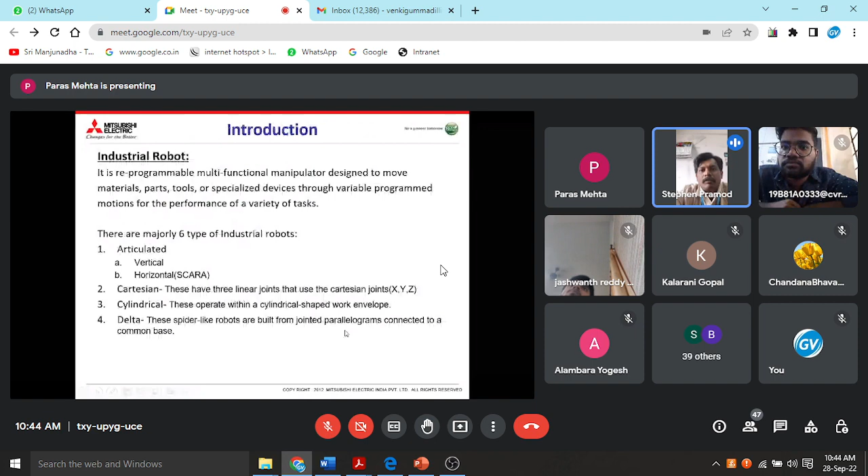Sir, can you put it on the slideshow so that the screen appears bigger? Yeah, good, sir. Thank you, sir. Now it's visible. Yes, sir, it is. Thank you, sir.

Okay, so we will see the control wiring for our emergency inputs and outputs and our booster, and we'll see how our teach box works. Then we'll see what are the types of softwares we have in Mitsubishi Electric.

And then in software we will see how to create a new program, how to create a new project, and what features we can use through our software, how to teach, how to make a new program, and how to set the robot origin and home position settings that we will see in these 2 days.

So today we will be covering most of the part of our software and teach box operation, and tomorrow we will be doing special programs for two programs we will make. One is pick and place, and the second one will be the pallet program, where the robot automatically will pick and place the object and place it in the pallet form.

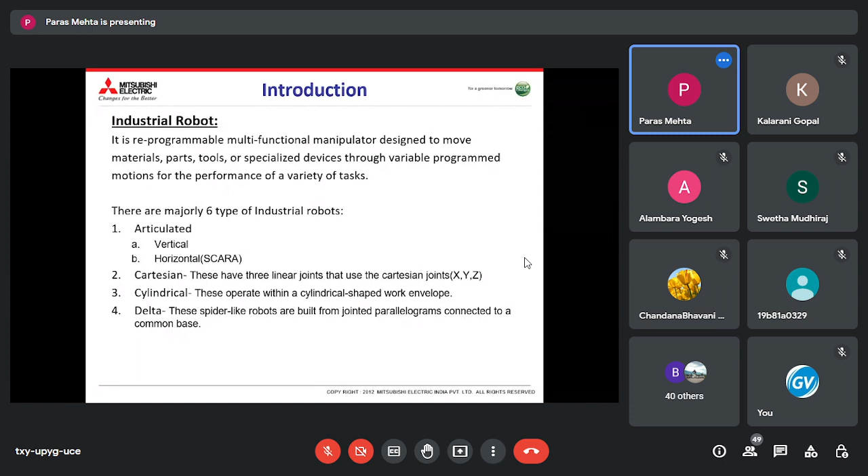So there are six types of industrial robots. First one is articulated - there are two types, vertical and horizontal. Vertical will be having 6 axes and horizontal will be having 4 axes. Second one is Cartesian, which will provide only three linear motions that I'll show. Third one is cylindrical - these operate within a cylindrical shaped work envelope. And fourth one is delta - these spider-like robots are built from jointed parallelograms connected to a common base. So these are the types of robots: vertical articulated, horizontal, Cartesian, cylindrical, and delta.

So what are the advantages of industrial robots? They provide repetitive work cycles, can work easily in hazardous work environments, and consistency and accuracy is very high. Difficult tasks which are very difficult for humans, the robot can perform. Multi-shift operations - it can work for a full day continuously. Programmable and flexible - we can change the program as per our requirement, and we can position the robot as per requirements. And it interfaces with other computer systems - we can connect other modules also with the robot for controlling.

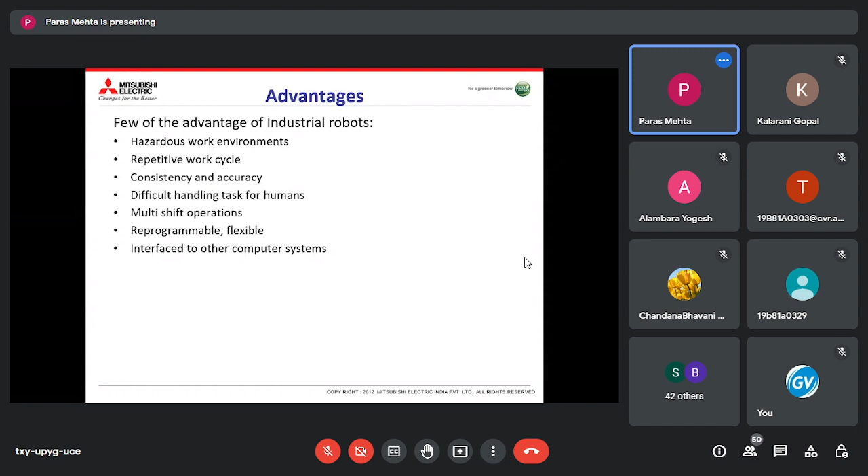So this is a 6-axis vertical articulated robot. It consists of joints and links. Joints provide relative motion and links are rigid members between joints. So we can see this is the base of the robot, and this is the J1 axis, joint 1. This is joint 2, this is joint 3, and this is joint 4. And this is joint 5 and 6. So it is a hand-like structure, and each joint provides a degree of freedom. There are 6 different degrees of freedom in 6 joints.

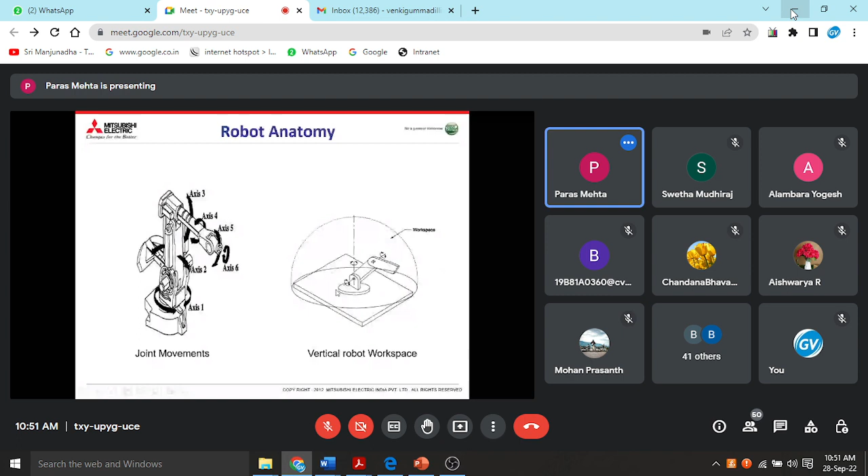Now we'll see description of various envelopes. Envelope means the area where the robot can move its arm maximum from its base. So this is the maximum envelope. We can see the robot can move in this envelope at any position.

This is the restricted envelope. Restricted means the space where we provide restriction like fencing and any other module or motor mounted for safety, and any door mounted. So this is the restricted envelope, and the operating envelope will be the black part, where the robot will perform its operation, or the application we have defined will work in this operating envelope.

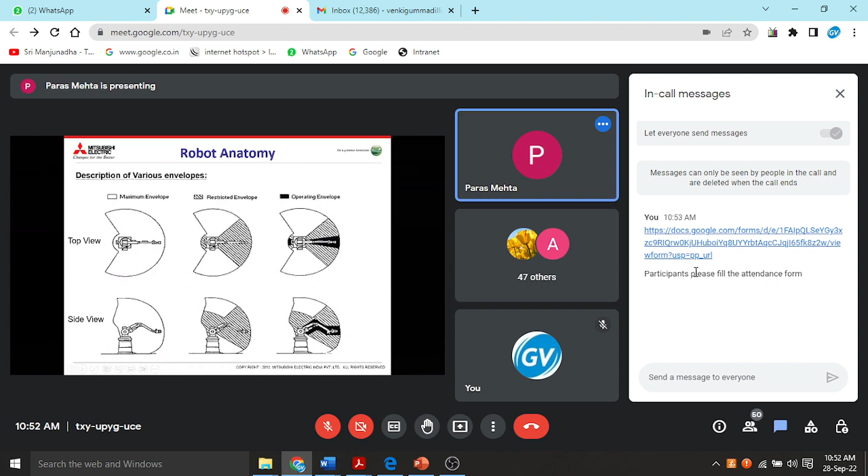Same way, we can see the side view. So again, the maximum envelope encompasses the maximum design movement of all robot parts, including the end effector, workpiece, and attachments. The restricted envelope is that portion of the maximum envelope which a robot is restricted by limiting devices like fencing. And the third one is operating, which is used by the robot while performing its program motions.

So this is our four axis robot. This is called a SCARA robot. SCARA means selective compliant articulated robotic arm. This means that the robot provides substantial rigidity in the vertical direction but compliance in the horizontal plane. This makes it ideal for many assembly tasks.

So this is the special type mostly used for material handling, for picking and placing, assembly, loading and unloading. So again, this is the workspace for a 4-axis or SCARA robot. In this complete workspace, it can move to any point.

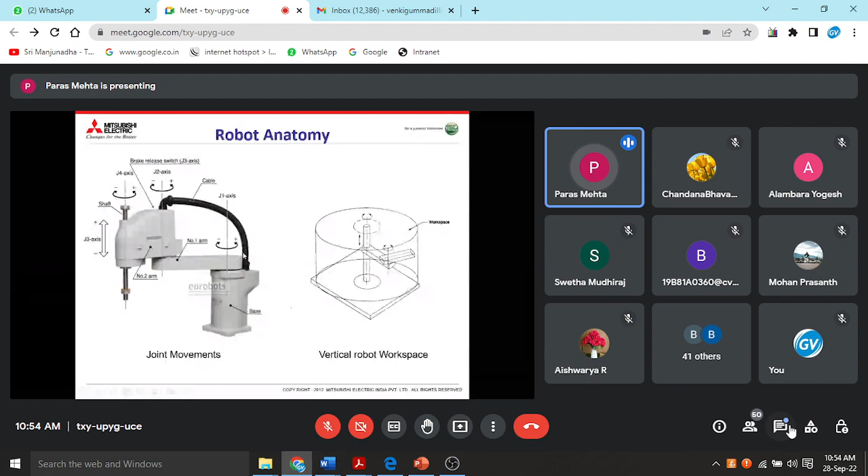So we will see the four joints here. One is the J1 axis that can move in minus and plus direction. This is J2, which can also move in both directions, minus and plus. Actually, each axis has a motion limit defined so that it will not rotate in a complete circle. But as per our requirement, we can edit the motion limit of each axis.

That we will see in our RT Toolbox 3 software. Yes, in the chat box a participant raised a question.

What does the envelope mean? Okay, okay, I'll just check.

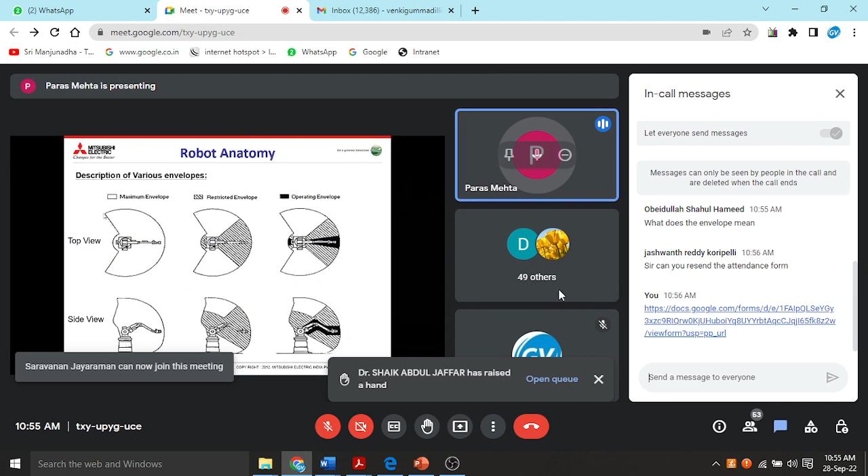Okay, I'll just explain again. So envelope is the maximum design movement. Like in this picture, we can see the actual factory default setting that came with each axis limit. So if I move the J1 axis, it will move from this end to this end. So this is the maximum envelope. It will not go behind this point, so this is the blank area behind. It will not go at this side. So envelope means the area that the robot can move to, its design parts.

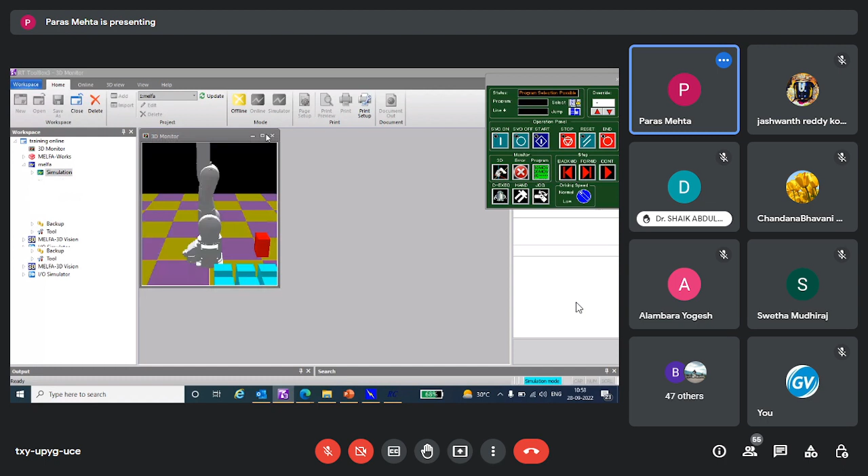Like I can show you right now for better understanding. As an example, I will show this in the software. So this is my FR series 7 kg robot. So for envelope, maximum envelope, we can see it like this.

The J1 axis is moving from minus 240 to plus 240. So this is the limit as a factory default that comes with the robot. So if I move the robot parts completely...

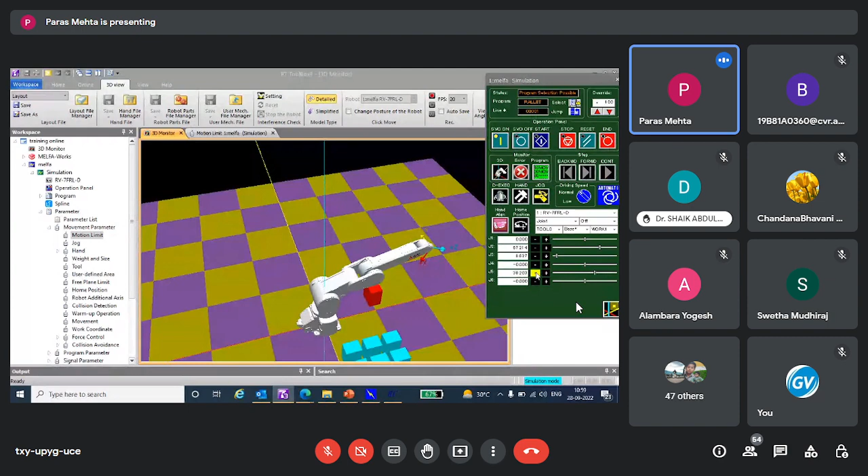So this is the maximum reach of the robot, and I'll make a circle like this. So right now it's 240 in the positive direction, till going to minus 240. So this is the complete workspace. But now what is happening? We need to check the envelope.

So we will set our limit as per our requirement, so that for this we can set this as our limit, and we can set this as our limit. So this is the maximum envelope we are defining for the robot, like we have just moved minus 240 to plus 240. So this is minus 240. Is this clear to all?

And we can also restrict the envelope. I'll also show you that in the software moving further. And we can also define this operating envelope too.

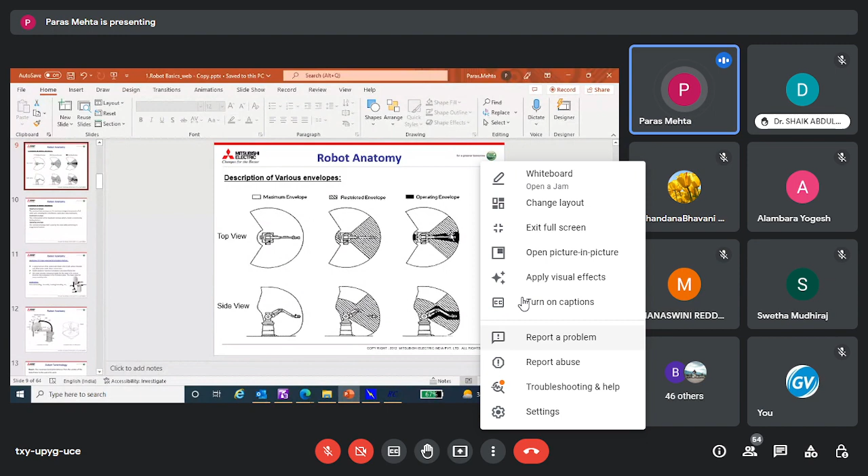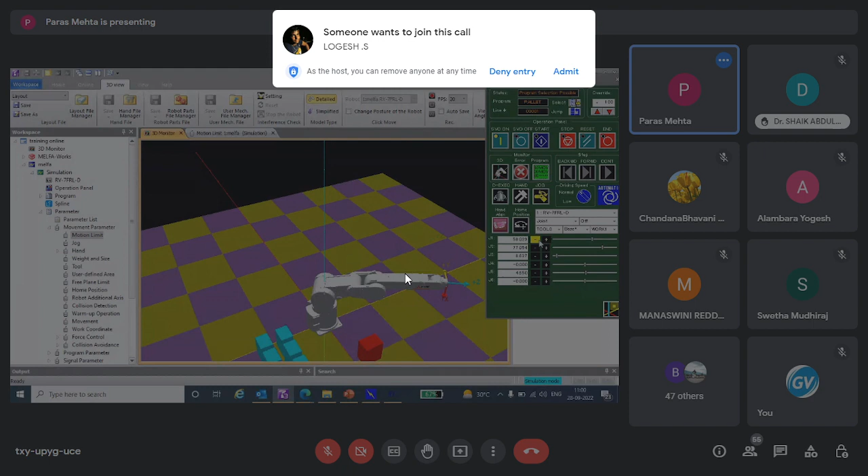So I need this. So this is 70, and this is minus 70. So I need this envelope as a maximum envelope. So what I will do, I'll set the motion limit and write it to the controller.

Now we will see the maximum envelope that we have defined. The robot should not move behind this point and this point. So this is our maximum envelope, it will not move behind this.

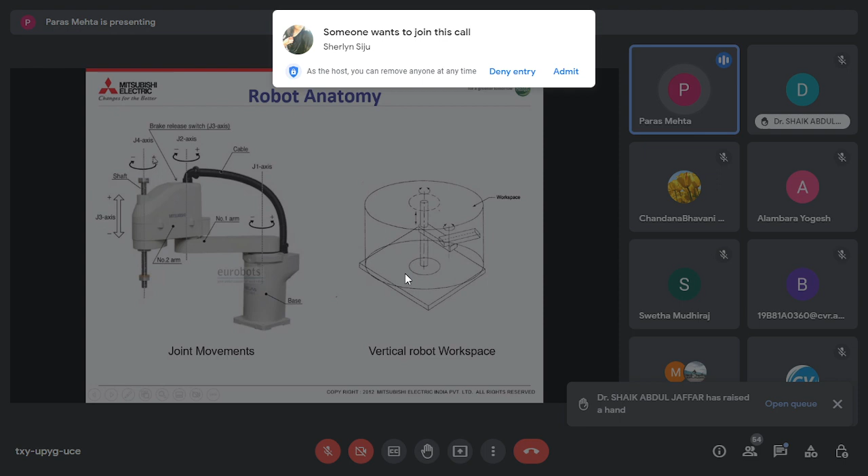For better understanding, I'll just show one video. So this is the SCARA robot. This is moving in J1 direction. This is J2, this is J3 and J4.

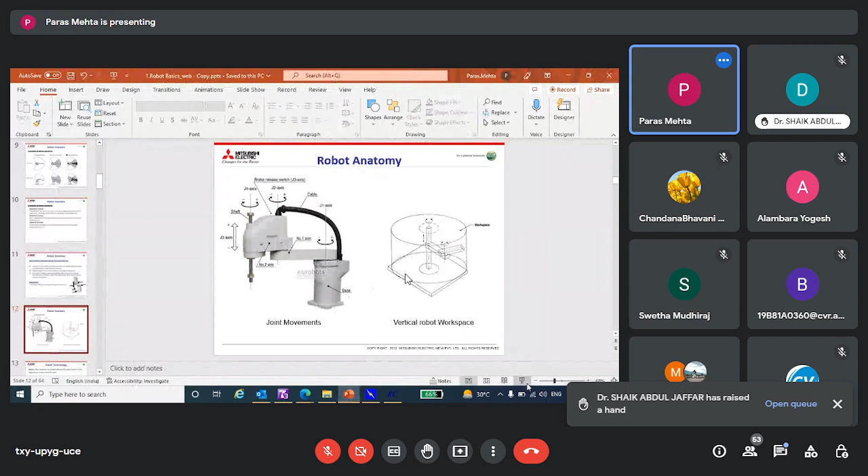Likewise, we can move to its workspace, like it's moving in rotational. So this is the SCARA robot.

So now we will see the robot terminology.

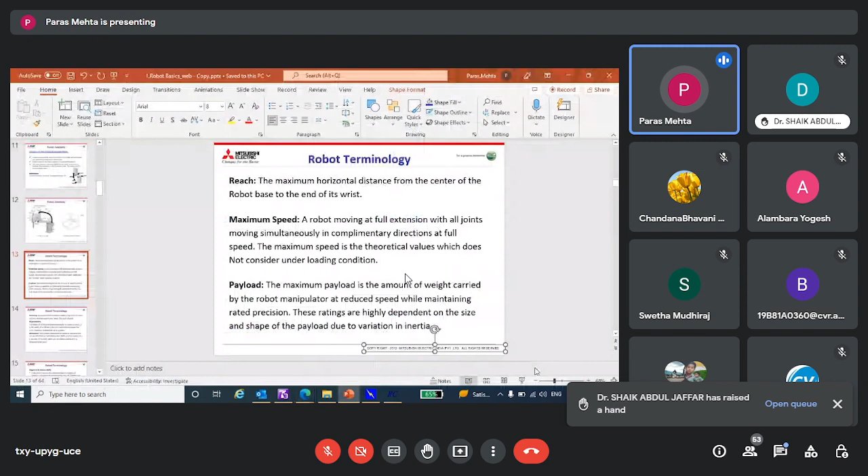Okay, now the robot terminology. There are six types of terminology: what is the reach, what is the maximum speed, what we call payload, and accuracy, repeatability, and resolution.

So we'll first discuss reach. The maximum distance the robot can cover is the maximum reach, horizontal distance from the robot base. This is the base of the robot. From here to the maximum distance it can move is the robot reach.

And maximum speed: the robot moving at full extension with all joints moving simultaneously in complementary directions at full speed. The maximum speed is the theoretical value which doesn't consider the loading condition.

And the third one is payload. It is the maximum load or maximum weight carried by the robot manipulator at reduced speed while maintaining rated precision.

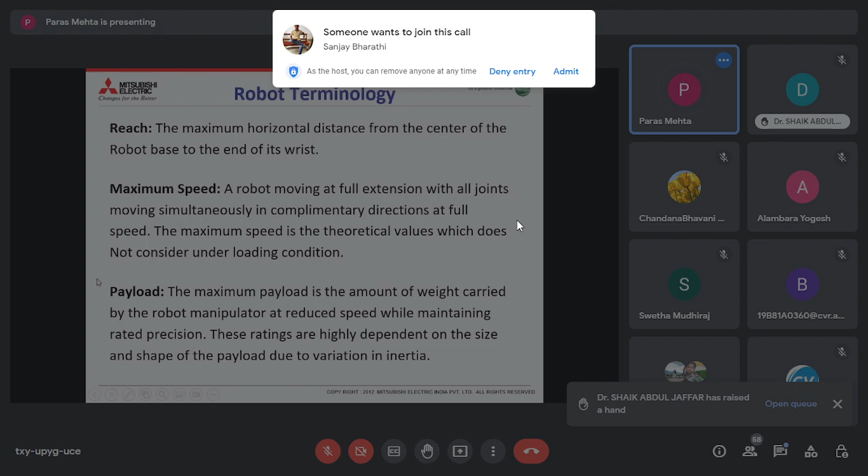So this is like we can mount our tool or hand at this robot arm in SCARA, and here at joint 6 we can mount our tool, like I have shown in a video, that is used for picking or placing. That is the weight of the tool that we are mounting on the J6 axis of vertical and J4 axis of SCARA robot.

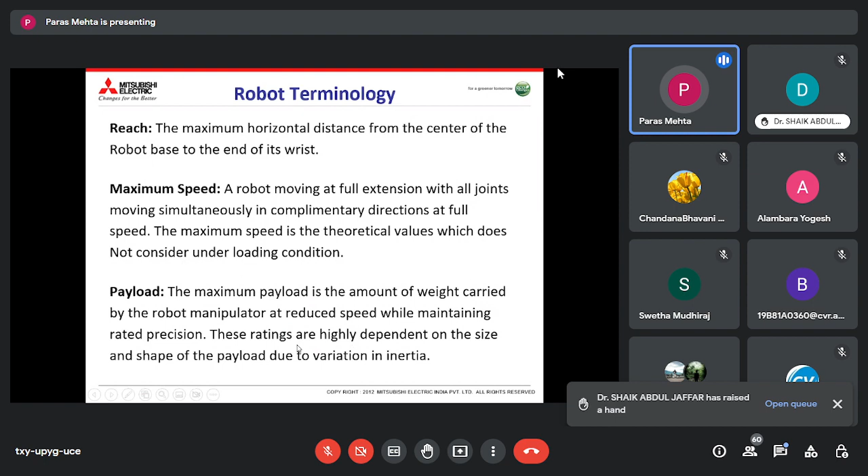Once you fill the measurement, these ratings are highly dependent on the size and shape of the payload due to variation in inertia. So we need to select the size and shape accordingly, so that the robot takes proper load as per the designated model.

So this is accuracy. Accuracy refers to a robot's ability to position its wrist end at a desired target point within the work volume. So this is the accuracy.

I'll share you the link. And repeatability is the ability of a robot to return repeatedly to a given position.

Like we can see the robot is performing the same cycle, so this ability of the robotic system and mechanism to repeat the same motion or achieve the same position and motion. So it will move through a cycle and it will end at its home position.

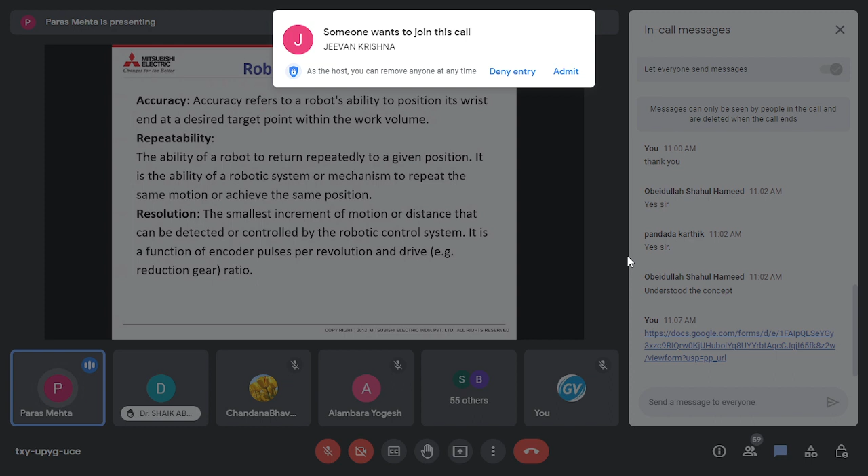So resolution is the smallest increment of motion or distance that can be detected or controlled by the robotic control system. It is a function of encoder pulse per revolution and drive, for example reduction gears ratio.

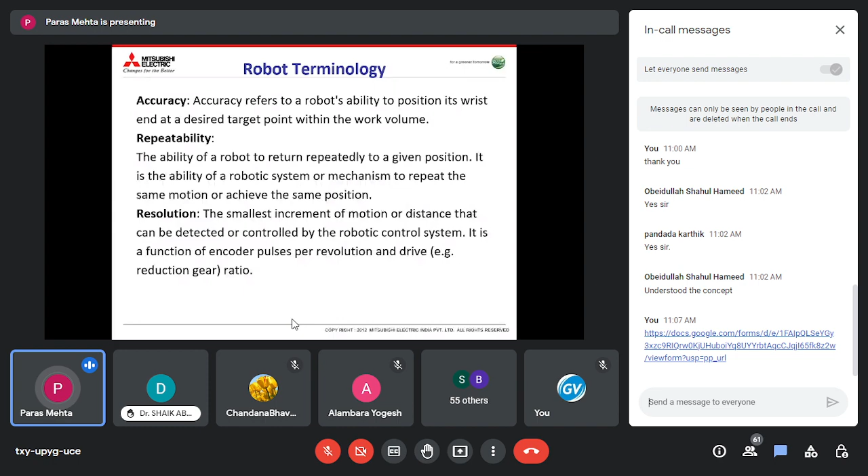So resolution is we can move to 0.01 degree. So this is the least count we can say.

And at high inching speed, there are two options in our teach box that we can select with our speed up and down. So this is the low inching, 2 is high inching, and this is the speed we can select from 5 to 100.

So resolution means the smallest increment of motion distance that can be detected. We can also change the inching degrees after pressing, like I can change it to 0.1, so it will move 0.1.

As per our programming specification, we can also change the speed. In jogging speed, we can change the speed, this is the least count, moving resolution.

Now, degree of freedom. Each joint axis on the robot introduces a degree of freedom. An industrial robot typically has 4 in SCARA, for example, and 6 in articulated systems.

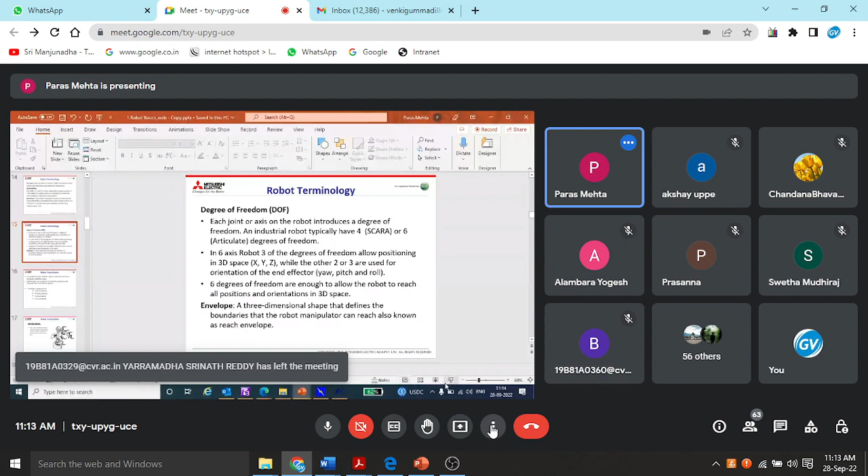So, have you seen this PPT? Yes sir, yes. So we are discussing about the degree of freedom. Three for six axis: three will be XYZ, and three will be yaw, pitch and roll.

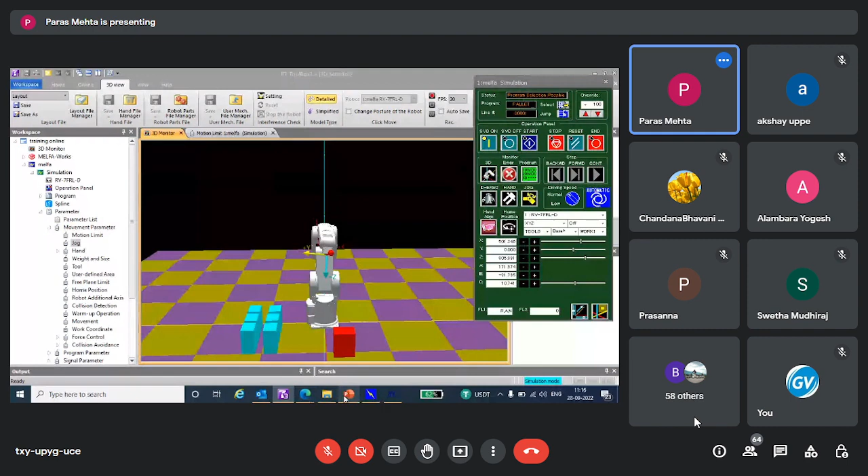So this is clear. With 6 degrees of freedom we can reach at any point.

So, robot coordinates. There are four types of coordinates, like joint coordinates, world, tool, and user.

So what is the coordinate system? Coordinate system defines a plane or space by axis from a fixed point called the origin.

So where is the origin, that we will see in each coordinate. Basically, for world coordinate, the origin is at the base of the robot.

Robot targets and positions are located by measurements along the axis of the coordinate system. So what this means is that in joint coordinate, first we will see the joint, then we will see the world.

So in joint coordinate, each axis we can move: J1, J2, J3, J4, J5, J6. So there are no Cartesian coordinates like X, Y, Z, ABC that we will use in world. So in joint coordinate, we can move the robot each axis.

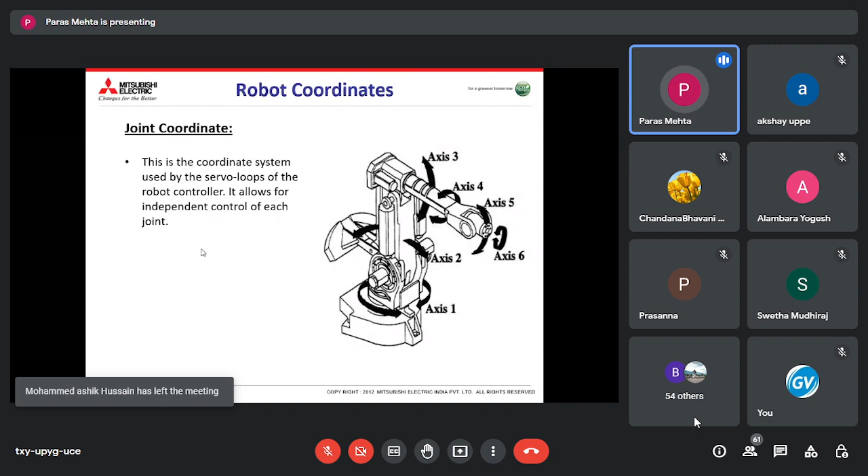I'll select the joint. So this is plus minus J1, this is J2, this is J3, this is J4, this is J5, this is J6, the last wrist rotation. This is J6, only the wrist part is rotating.

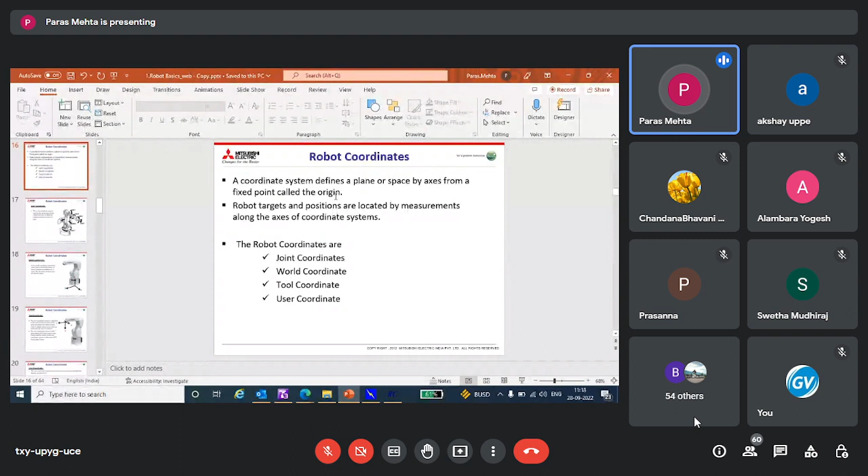So next is world coordinate. This is saying that the space by axis from a fixed point called the origin. So for world coordinate, the origin is at the base of the robot. So we can say the XYZ value will be 0,0,0 here at the base, and wherever the robot point will take, for even picking or placing the parts or the workpiece, it will take all the values with respect to this origin point of 0.

We can see so it is now base with respect to this.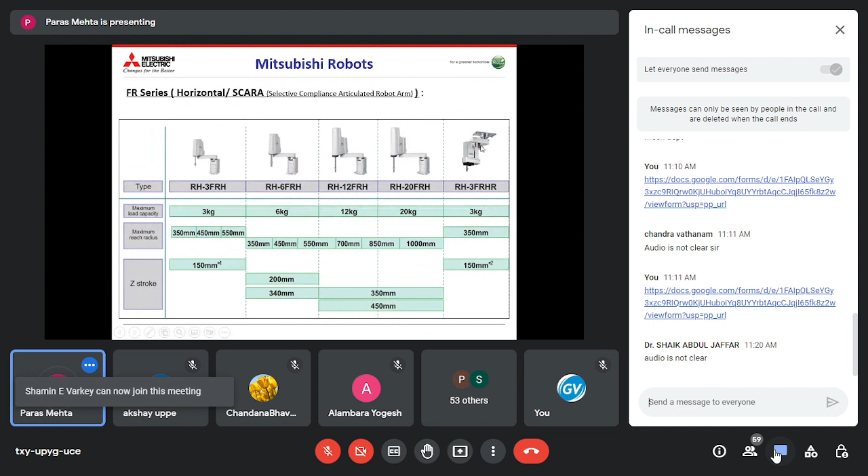So what is the nomenclature that we use for defining a robot model?

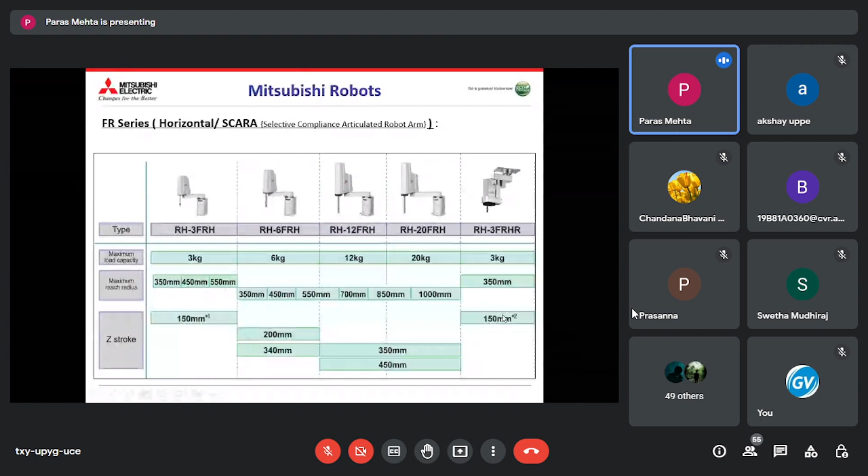So this is the same nomenclature for the horizontal type. The difference is the series.

Sir, your voice is breaking. I think there is some network issue on your side. Your voice is not audible, not clear. Now it's clear, sir. Yes, it's clear. Okay, thank you.

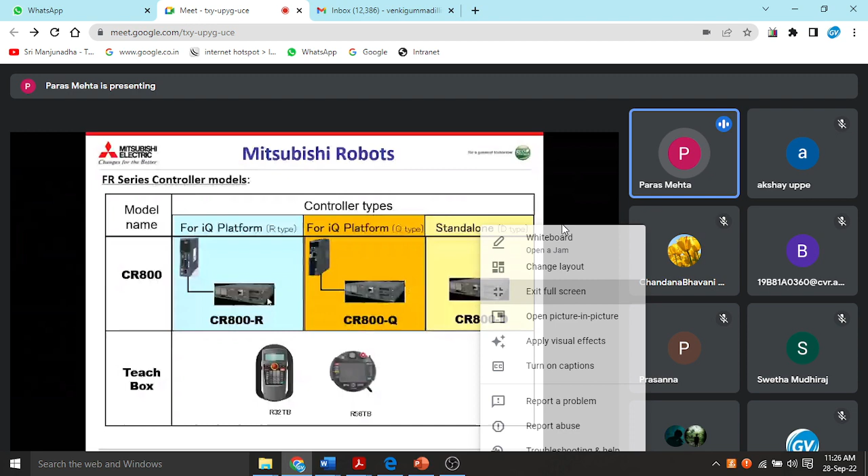So there are three types of controller: D type, Q type, and R type. D type is the standalone type. We can use it for hard wiring, or with the help of CC-Link, we can perform our operations or applications. This is the Q type and R type.

This is used for long lines for some applications, where we can connect one CPU with multiple controllers. This is used for controlling 4 or 5 robots working in the same line with the help of one Q type CPU, which is an add-on CPU connected with the controller.

Same way, this is the R type connected with the controller. This is specially used for a line having 7 or 8 robots working in rhythm, while D type is the standalone type, used when we are having just one cell and one robot.

So there are two types of TB: this is the advanced level R56 TB, and this is the basic level R32 TB. We will see what both TBs can do in the future.

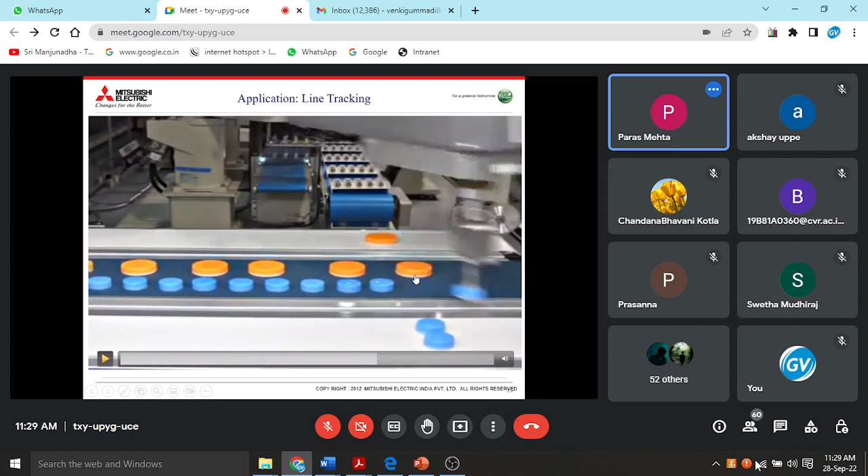In this video, the robot is self-tracking all the parts coming on the conveyor, segregating both parts with the help of a vision camera.

So in this, the camera is integrated with the robot. When the camera sees any device, there are two colors, so it will automatically pick that part. This is the application called line tracking.

Another one is machine tending. The robot performs an operation of picking the workpiece from the conveyor and putting it into the machine, then picking up the finished good and placing it at the final position.

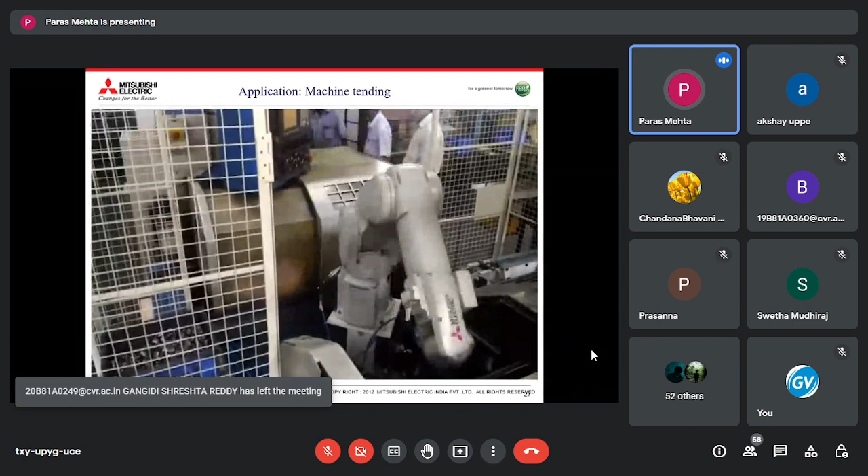Here we can see the synchronization of the robot with these two machines. One machine is finishing the job and the second one is doing the job, so this utilizes the whole time for making the part, working on both sides with this synchronization.

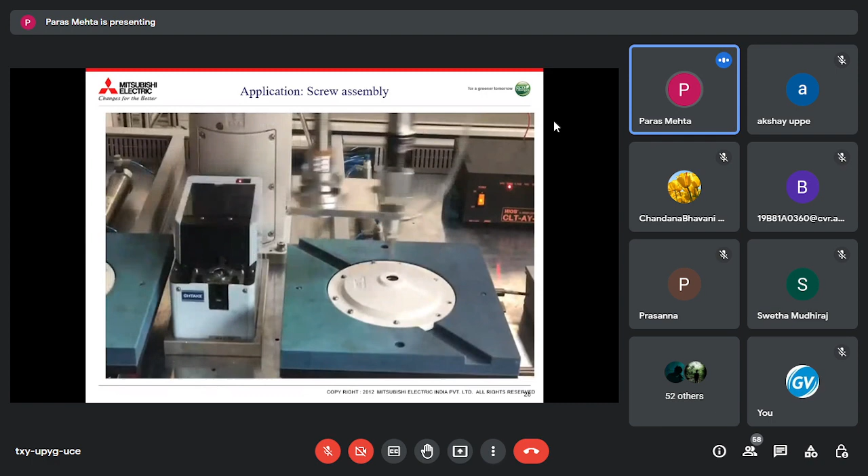Now the third one is screw tightening. This is our Scara F series robot. At the center there is a screw feeder, and the robot is picking and screwing the workpiece. This is the screw assembly application.

Now we will see the power and control wiring for our latest robot, the FR series CR800D controller.

Here we will see the connectors and options available for wiring, and what these two slots are used for. So this is the front view and this is the rear view.

We'll start with the rear point. So this is the AC power supply. There are two types of power supply we can provide to the controller: single phase or three phase, which will be written on the sticker. We can see this is 200 voltage class. So this is a single phase AC in, and the second point is used for earthing, and at the back side there is one air exhaust.

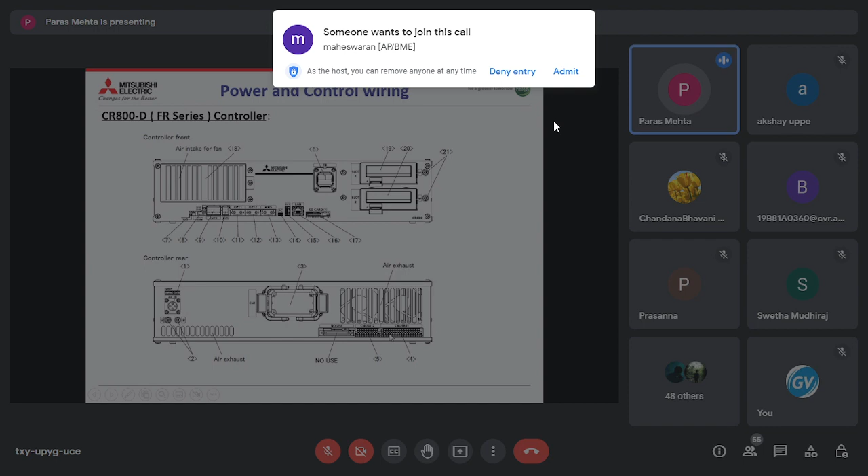On CN1, this is the connector for connecting the robotic arm with the controller. For now this is for no use, it's just a connector. And this is CNUSR 11 and 12. These two connectors are used for our switch selection, so we need to do wiring on these two connectors. Mostly the CNUSR11 connector is used, that we'll see in the wiring diagram. On the front side, there is an air intake fan. Two fans are mounted inside this cover, which are taking the air inside, and one filter is also there for cooling down the PCBs.

Sixth one is the teach box connector, for hard wiring purpose, IO optional card like this, we can see here. This is slot 1 and slot 2.

And 17th is the SD card. And this is the USB and PC, these we use like if we want to perform any program, mini USB, LAN for additional access with the software.

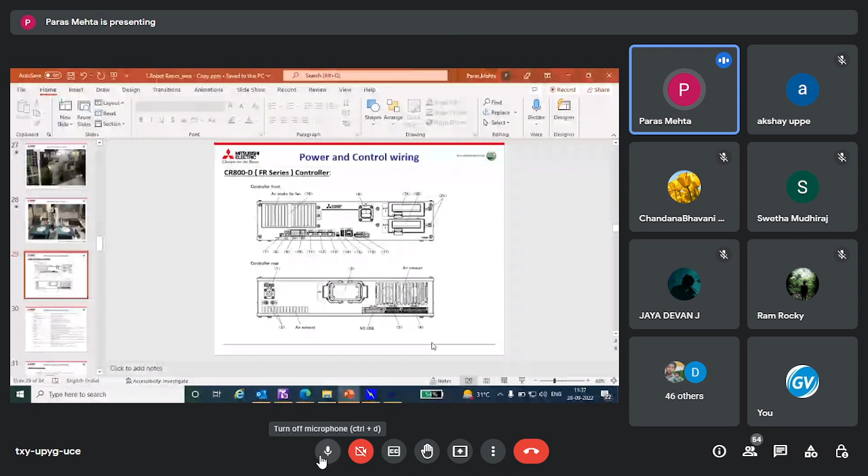you Sir, again, network issue, sir, I think from your side. can connect this option. Sir, audio is not clear, sir. I think network issue again. Now it's clear, sir. Hello. Ah, sir. Yes, sir. Now it's clear. Now it is clear, sir. Earlier, it has problem. Okay, thank you. Screen is visible to all. Yes, sir. It is visible.

So option one and option, this is the configuration.

Hello, sir. Again, network issue, sir. Your voice is not clear. Dear participants, please be online with sir rejoining. Please regret for inconvenience caused. Regret for inconvenience cost. Sir, disconnected, sir, yours. Okay, okay, sir. Fine, fine, sir. Okay. My voice is clear now, sir. Yes, sir. Yes, yes, yes. Sorry for the inconvenience. Actually, the network, I think, some issue.

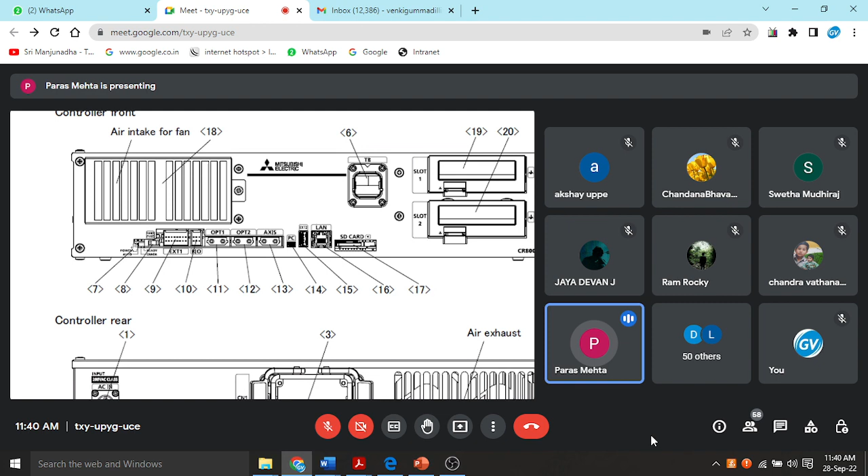And seventh one is the LED panel. It will show four LEDs: power, auto, error, and ready. We can see at this point these four LEDs: power, auto, ready, and error. If there will be any error, it will show the red light, and for power, it will show.

Yes, sir. Yes, sir. Sir,

So this is the connection between our controller and robotic arm. This is the cable, we call it the machine cable, for connecting the robot and controller. And this is the AC power supply we are providing to this connector.

So this is CNUSR11 connector. The numbering is provided like 1 to 16 on the upper lane and 17 to 32 on the bottom lane. Now we will see these points 1, 2, 3, 4, 5: what is the need of these points and where we need to do the wiring for providing any input to the controller and taking out any output from the controller.

So here we can see the 14th and 30 number point in that connector, we can give the input for emergency stop, external emergency stop. Actually, there are two points for each input. If it's not working, we can also connect on 7 and 23, that is 7 number pin and 23 number pin of CNUSR11 connector. Same way, we can connect the door switch input on 13 and 29, or 6 and 22. So there are options for these two: either we need to connect on this or on this.

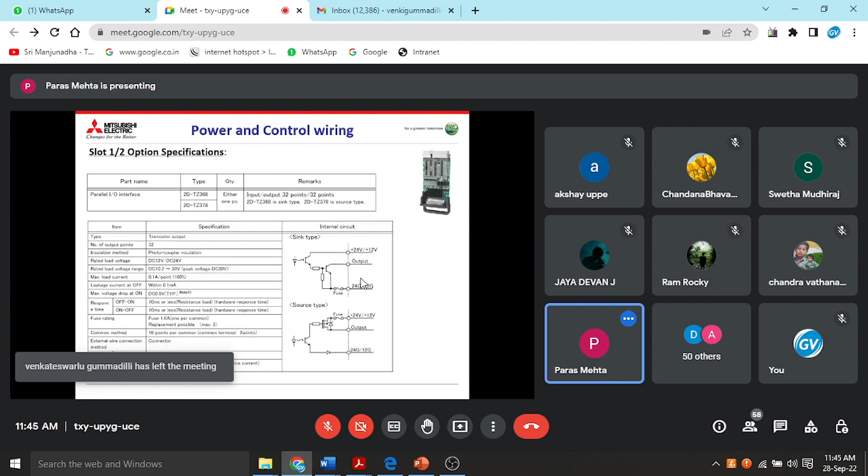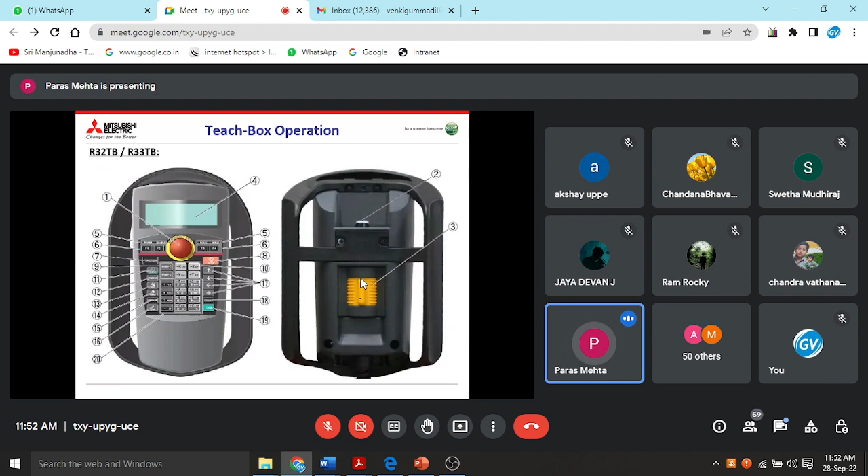This is the back button, and this is the menu button, and this is the complete up and down button for speed up and down, and this is the home position button.

The 9th one is the servo key that we need to press while servo on, and the 10th one is the reset key.

And this is the error we are getting, so this is for getting the error message, and this is the stop button. So these are all the buttons. We can perform any operation with the help of all these buttons.

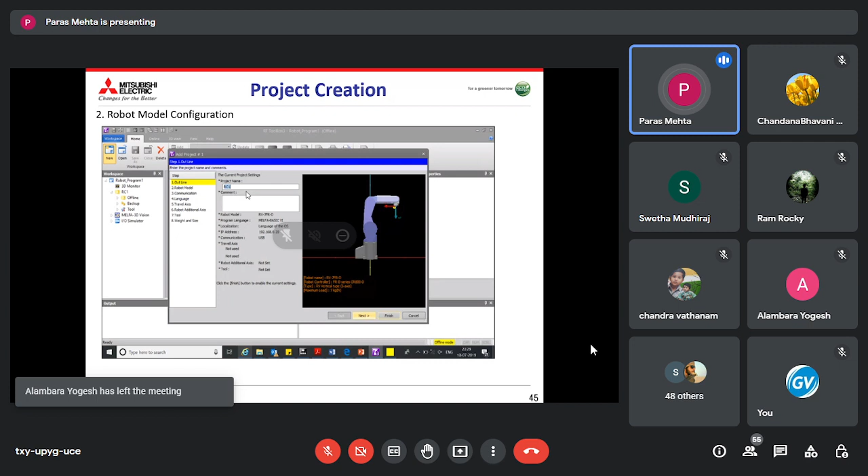So we will enter the details, project name - it's taking RC1 by default, but we can change the name. The second one is the series type, maximum load, and what is the model of the robot we can select in this tab. After this we need to do the settings for communication with the controller.

We need to connect with the USB or Ethernet cable, which we will select in this method. If we are using an IP address Ethernet cable, then we need to check the IP address in the robot and set the same settings on our laptop.

So this is the program language. Melfa Basic 6 is the latest language. By default we will use this.

So this is the travel axis. If we are using any additional axis, then we will select this, otherwise we will not use it. So these four are mandatory - this is 1, 2, 3 and 4. These four are mandatory.

We can just finish it up here also, because if we are not using any tool or any robot additional axis, we don't need to go past this window. So this is the same additional axis - if we are selecting any tool, we need to define the dimensions, and we need to define the size and weight.

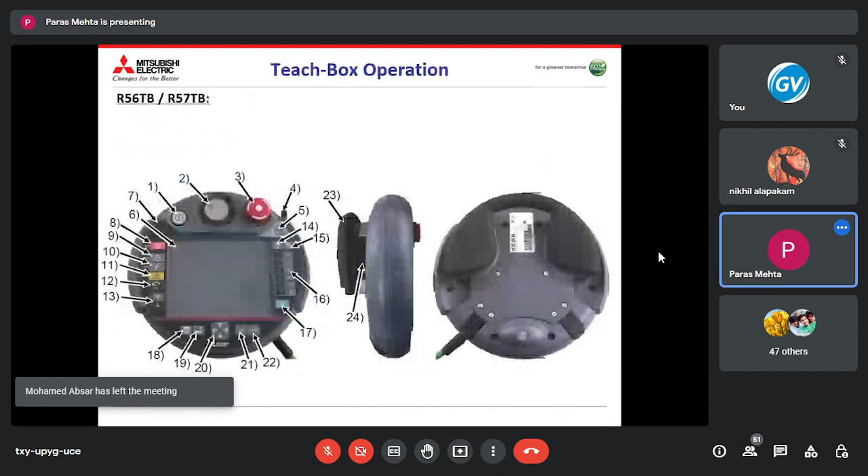If the robot is in auto mode, this switch should be in off condition. If it's on, you will see the light appearing. But this must be in off position, and our mode will be in auto mode, then we will go online if we are connected with the controller. And if we are just simulating, then we can select the simulation.

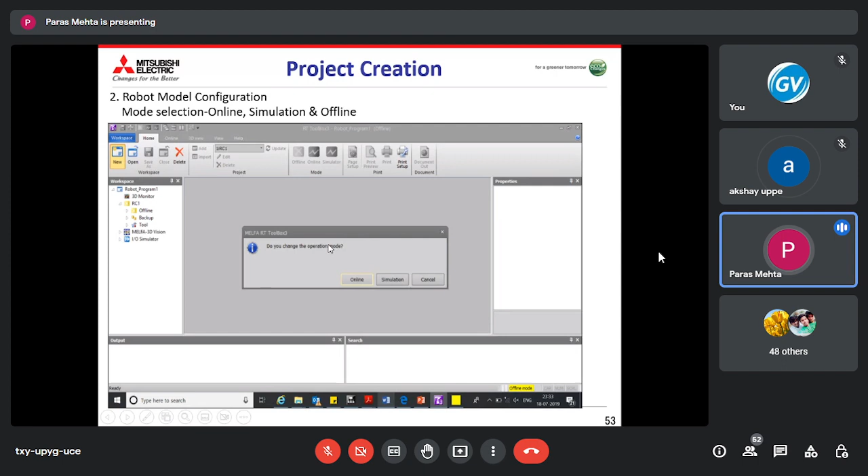So after simulation, we will see this window - this is the 3D monitor of our robot that we have selected here. We have selected the robot model number here, so we will see that same model in the 3D monitor.

And this is the teach box inside RT Toolbox 3. So for a new program, what we will do is just press on this simulation.

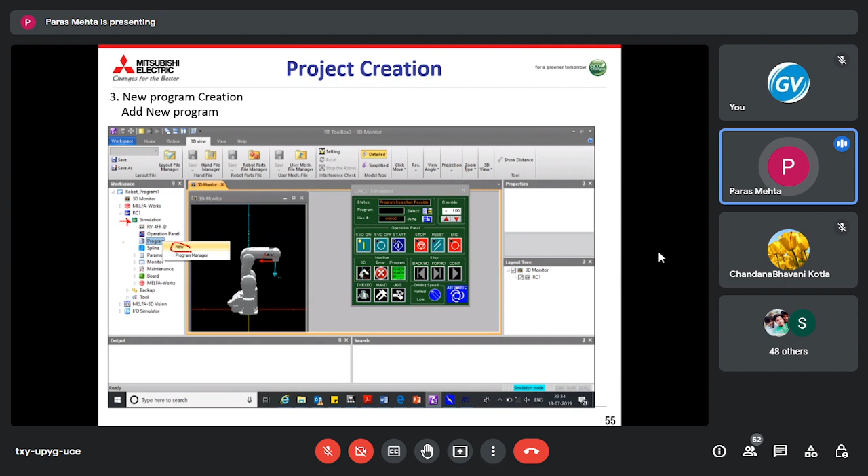So we press the simulation. In this, we check these options are available. Then we right click on program and select new. After selecting new, a new window will appear like this.

Then we will enter the robot program name, whatever we need to define. Like it's taking new one, we can take any name, test, online training, something like that, as we will see.

Now how we will take the backup and restore the backup in the controller, that we can see in this backup line here. Backup.

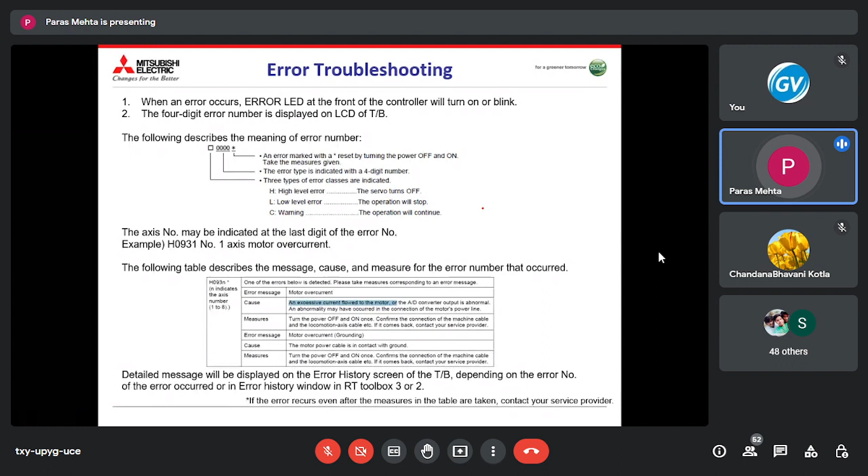So lastly, this is the error troubleshooting. Whenever an error occurs, the error LED will blink or turn on. This is the table that describes completely what is happening, what is the cause, what is the error message, and what measures we can take to eliminate this error.

We can also take the error history, which I will show you in RT Toolbox 3 software. So this is the complete robot basics that we are going to learn in our software.

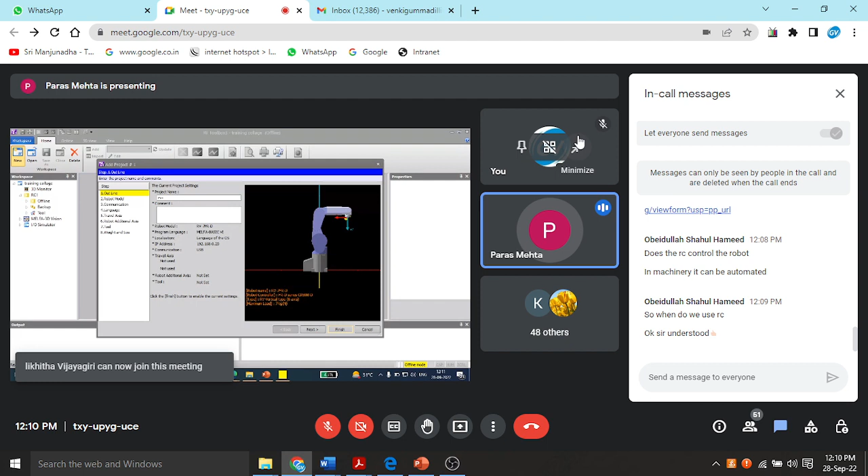RV4FRL, my robot model number 4FRL, and next.

Here we will select the robot arm, so I will be selecting 4FRL. I need to find the options for getting that model. This is the CR800 FR series, the latest series. There are three types, I have already told you the DRQ. I am using the D type for 4FRL, and I'll be taking the vertical robot because it's RV-4FRL, so I will take RV. If it's RH series horizontal type, I can also select the horizontal.

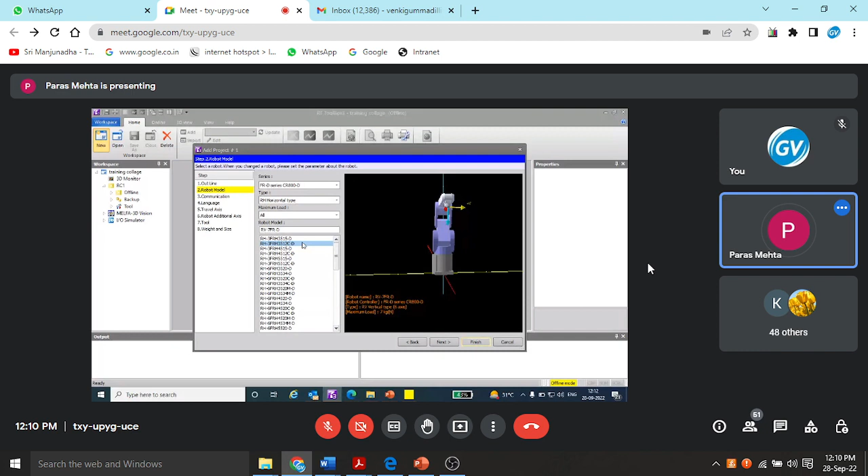This is like we can see the horizontal type. We can also select anything. I have selected the vertical type, 6 axis, and my load is 4 kg, so I'll select the 4 kg here. So the options available for 4 kg are visible here. My robot is 4FRLD, so I will be selecting this.

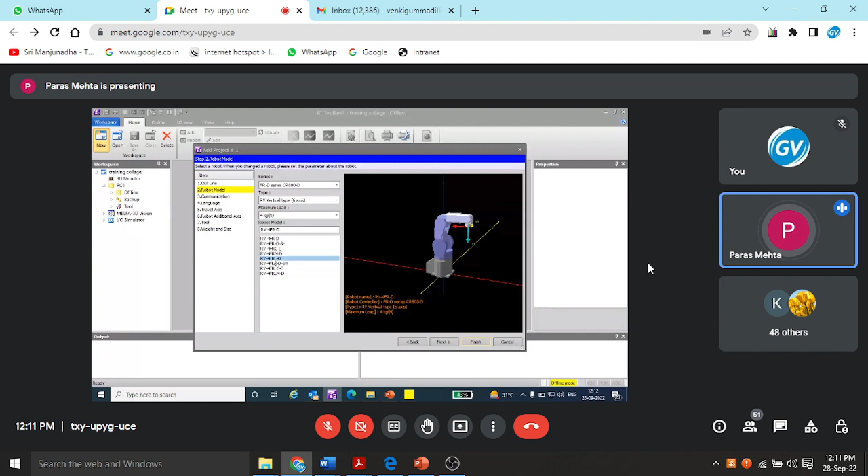What is the difference between 4FR and FRL? The L present here means it will be a long arm. We can see the difference in the picture also. If I select 4FR, then it is the short type, and if I select 4FRL, it's the long type. So we can see the difference here too.

So next, what is our mode of communication? I will be using Ethernet, I will be using USB, or I will be using GOT. We can select here, so I will be using the USB.

And if we connect with Ethernet, this IP address setting needs to be put in our laptop, the same IP we need to set. So I'll be taking, for simulation we can select anything, I'll select TCP IP. Next, by default the language is Melfa Basic 6, so I will be selecting this only, and in last, finish.

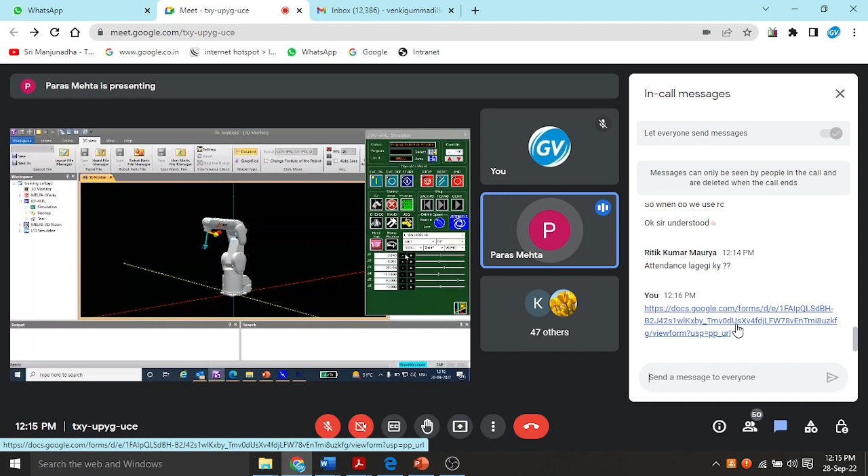So first I will take the joint mode, and this is the home position. This is the home position by default in every robot. So first I will change this home position, and we'll see other options also.

So in simulation, if this operation panel gets cancelled, we can select this panel from here also, and from online here also. So there are these options.

This is the 3D monitor. This is the operation panel. This is the program, we can see what we have programmed here. Select the name, this is a spline function.

The spline function is like we are editing any file, inserting any file in the software, and we will see that pattern here, we can edit like this. In monitor we can see the signal, what signal the robot is getting.

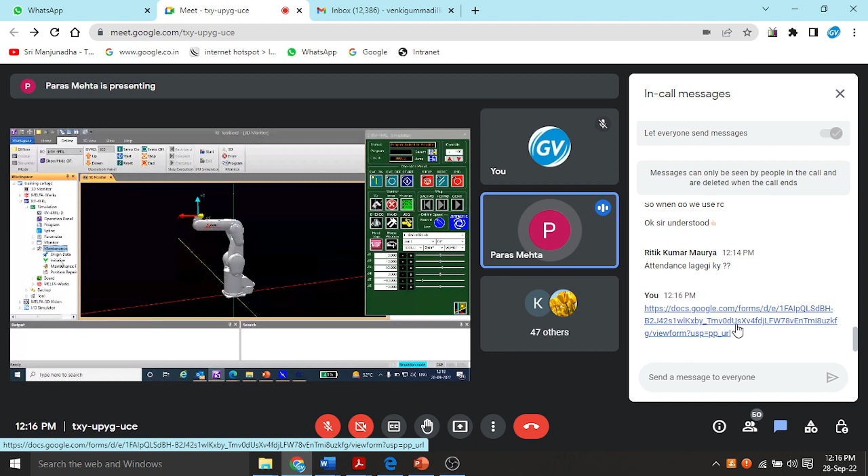And in maintenance we can check the origin data. What is the origin data? If we need to initialize any battery or parameter, then we can select this, initialize. Maintenance forecast shows the life of the robot,

like robot timing belts and grease life, we can check here. The standard life is 24,000 hours, and this much is remaining. For belt life also, 24,000 hours is the total robot belt life, and this much is remaining. So this is the simulation, we can see it like it's a new robot.

But what if we want to reset any grease or belt life? If we have refilled the grease, or if we have changed the belt, we can select the axis where we have changed or refilled the grease, like this, we can select and reset the grease life.

So this is the forecast we can see, and for this we can take the backup also, from controller to PC. If we take the backup, it's for reference, to see what we have done before, what was the life, and after resetting what is the life. I have taken the training college as a workspace, and this as the project name, and in this it is saving the maintenance forecast file. So I will save.

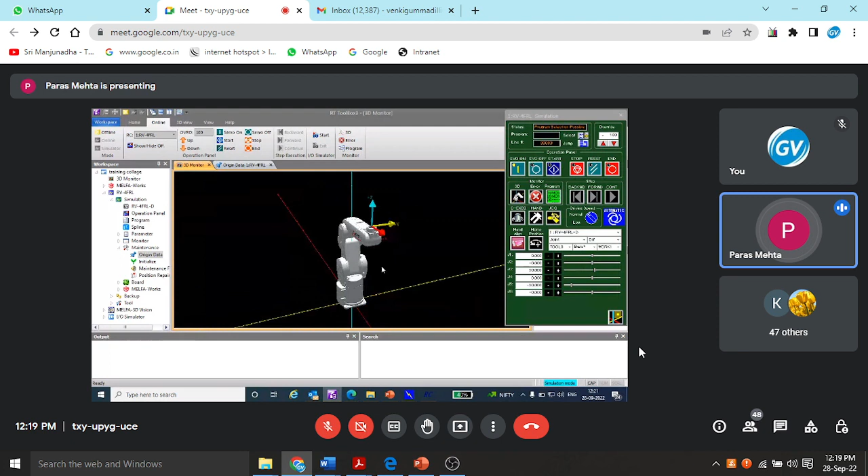So in the actual robot there will be marking available on each axis. In the simulation part we can't see that marking, but in an actual robot we can see the marking here at J1, here at J2, here at J3, and here at J4. So we need to match that arrow for the ABS method at each axis. Then we can select the origin.

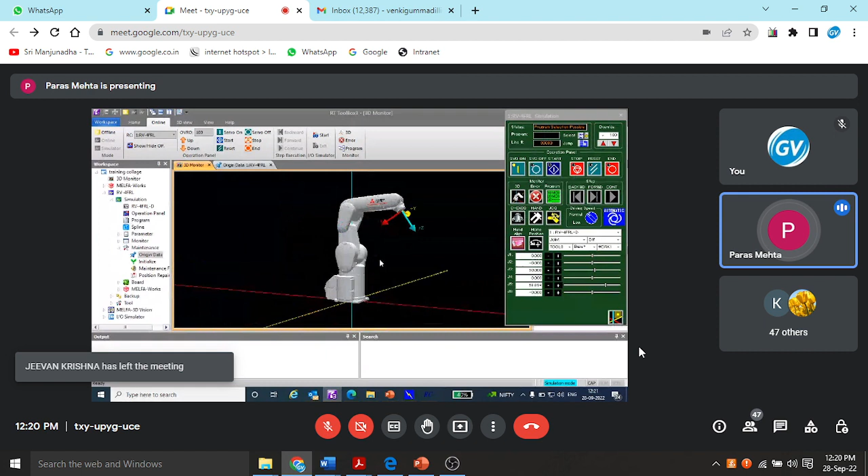So why is origin necessary? Why do we require the origin? If we don't set the origin in the robot, then it will not take any position from the reference 000, because we need to first define the origin for each axis so that it can take the value and show that actual position value. And if origin is not set, it will also not work in any Cartesian coordinate. It will just rotate in jog mode. It will only work in joint mode. Any other mode it will not work.

So for origin data I will be selecting the ABS method. After matching the arrows on each joint, each axis, we will select all axes and set the origin. So now the status has changed to ABS.

Now we can see the user origin method, what we have used is the ABS method. So for each axis at this position, the robot has been origined here. So now origin is done.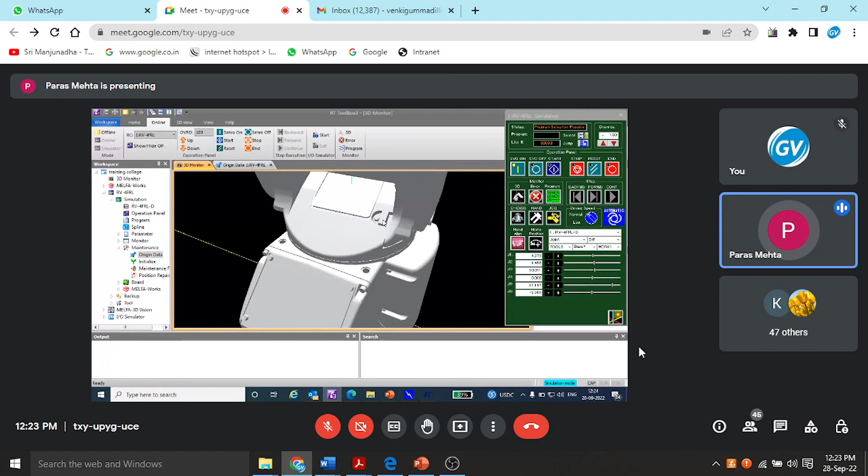Again, we can take the backup and restore this data to our controller. Another three mechanical ways are there: mechanical stopper. At each axis, there will be a stopper like this. We can see here, like J1, this stopper. So we need to rest the J1, J2 axis here.

Again for J3, this is the stopper for J3. This part will come and rest on this. So likewise, we can set this different method of mechanical stopper. We can only set the J1, J2, and J3 axis with mechanical stopper, and for the rest we mostly use these two methods, tool method and ABS method.

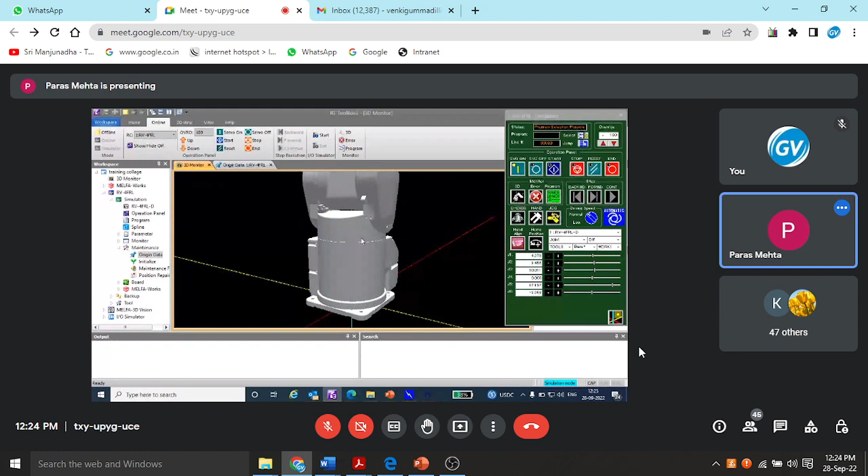For the tool method, we need to insert a tool at each axis. Actually, it's not visible in simulation.

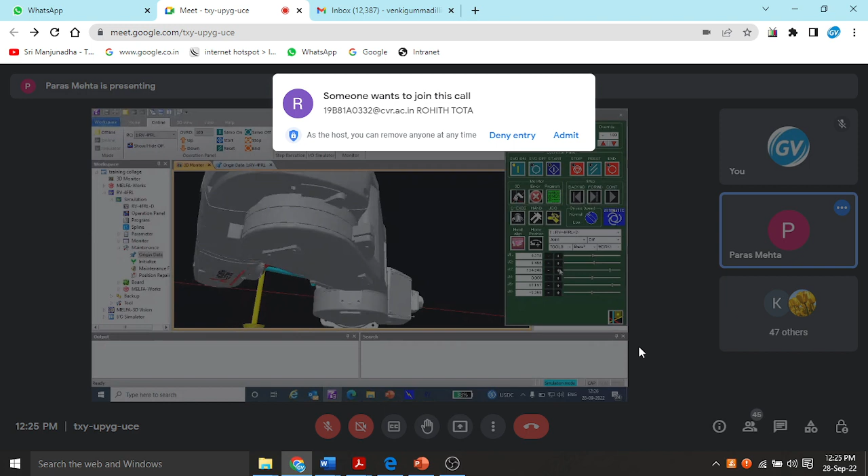Yeah, we can see at J3 axis. Here we see one hole, this one. J3, I will just check. Yeah, right, so we can see this hole here and one hole here. After matching this hole, we will insert one tool here that will cross through this body part to this long arm. So if it's qualifying both holes, then it is set for J3 axis.

Likewise, at each axis we have these two qualifying holes. With this tool method, we can select. But if we don't have a tool with us, or data with us, the ABS is the easiest way, two arrows will be visible on the robot. We need to just jog each axis and match the arrow on the complete robot, and we will select the ABS method here, set the origin, and set origin. So this is the best and basic method.

Now we can also take the backup for the origin parameter. It will show the complete values that are stored. Now I will select save to file. Again, it is saving the file in others. In my project name, I'll write origin backup and save.

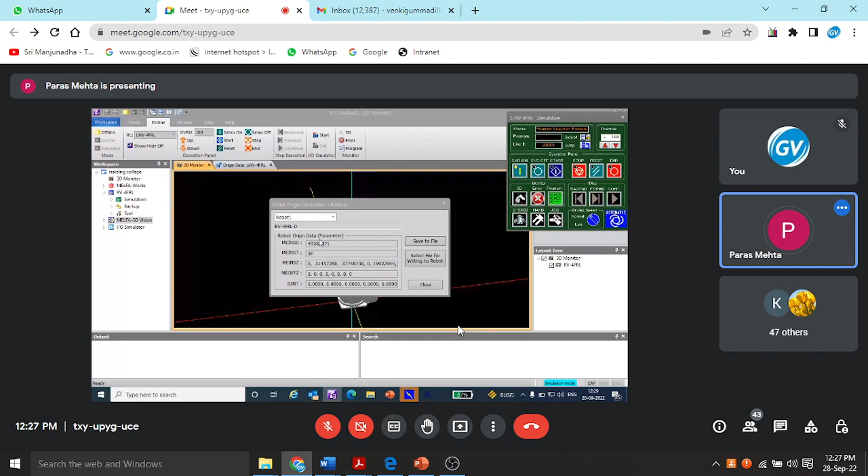Now the origin is restored, so the origin part is clear to everyone - how to set the origin, how to use the ABS method, how we can see the data of each axis. Yes sir, it's clear, sir. Okay, and the maintenance forecast method is also clear, na? Yes. Okay, we'll move further.

So for using the various parameters, for the programming part, we will do programming on day two, that is tomorrow. We will do the sample programming, and for these parameters also there are things to cover.

Sir, the participants are asking about the installation procedure for this software, just to do practice. Shall we have a discussion tomorrow, sir, about that installation process at the starting of the section? Yeah, we can just download the RT Toolbox 3 from our website. Is it available for everyone? Yes, the software is available on the website.

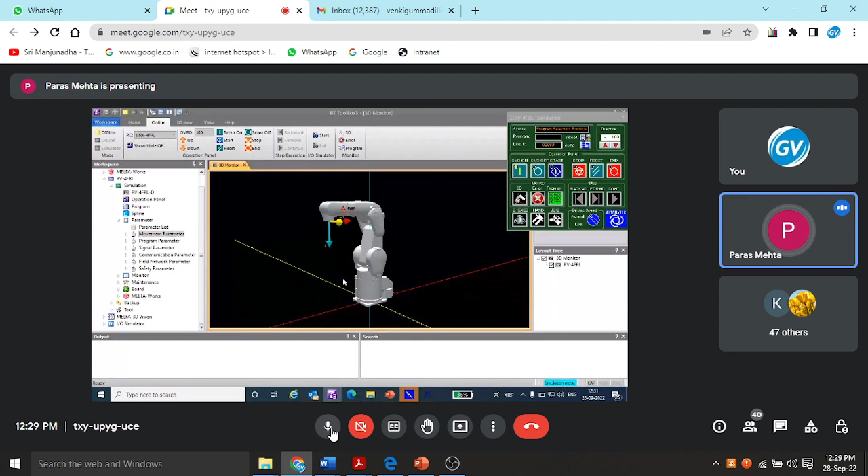Everyone can download the latest version. And for manual help also, they can click on help, then manual, then RT Toolbox 3. If they require any operations, what are the features, if they are having any doubt, they can read it here. Any commands they need to check, how to do the programming and everything, they can see in this manual, RT Toolbox 3.

Just to show the contents - this is the RT Toolbox 3, user changing the display language, how to download, starting everything. We can see how to create a workspace, project, online, communication, whatever they want to know, they can have this. Any communication gap they are having, problem they are facing, they can check in this section. Any writing program, reading program, how to make command, everything is available in this manual.

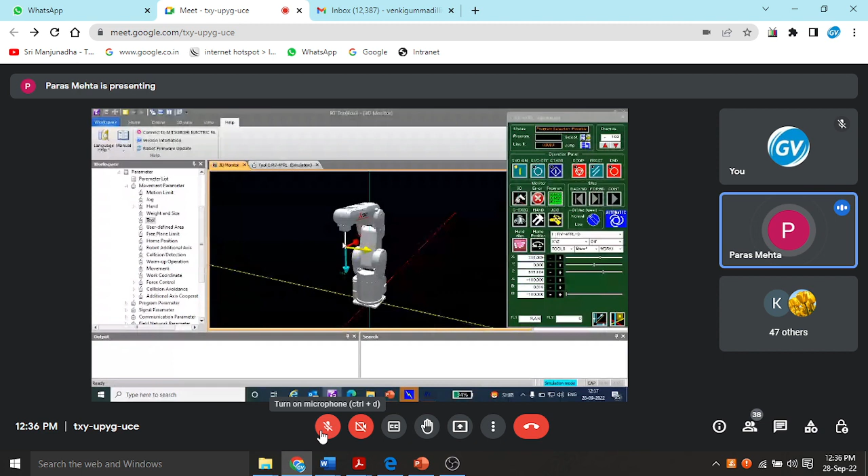So now the robot, before it was on 000, like on the wrist part. Now my tool is added in this robot. Now all the position XYZ reference values will be 0 at this point. From this point it will take the values. And for TCP also, the tool center point has also changed.

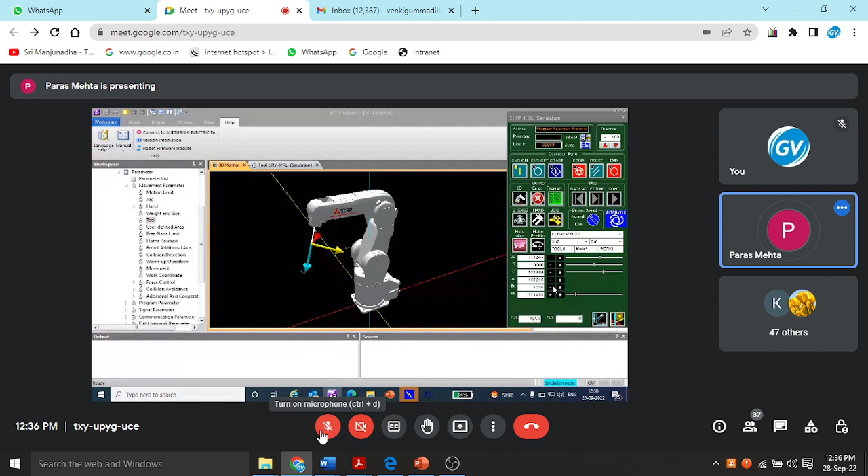Now if I rotate the robot, it will rotate from this point, not from this point. See? Likewise, I can change my TCP, and it is necessary to change the TCP according to the tool.

For the information of the controller, we need to enter the weight and size of the tool we are using. So data 0, if we are using tool 0, we have taken tool 0 here, so we will be using the data in here. Just for the information, we will add the information. If we are using any 3 kg, then I will write 3.

And for size, I have already, like in X, Y, Z, what will be the value, we will just put it here for the information of the work and write it to the controller. So this is the information I have given, and this is the tool I have given.

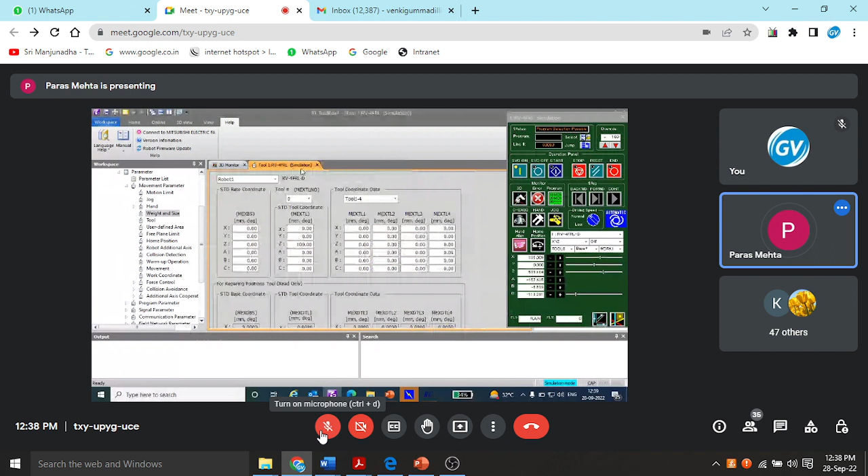What if I need one more tool on the same robot? I need one more tool mounted on the same robot, so I will use tool 1 here. Tool 0 I have already taken, but I need one more tool, so I have selected 1. And for tool 1, any value I will be taking, I'll enter at this MEXTL1. So if I need one more tool, I will select 2 and enter the information in MEXTL2.

Likewise, we can add 16 tools on a single robot, but for that, we need to disassemble the current tool and assemble the required tool again and again. Likewise we can use 16 types of tools. The tool part is clear to all.